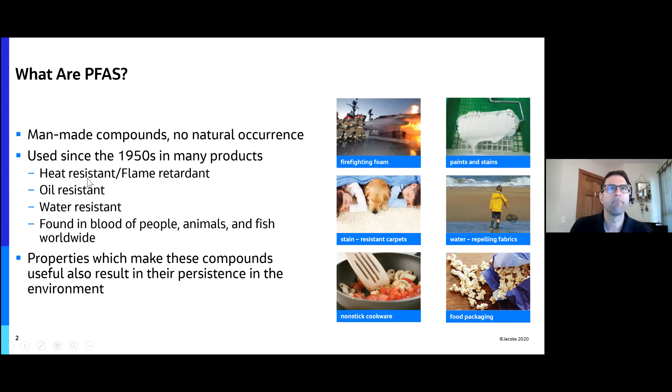Let's see. There we go. Okay, I got it moving now.

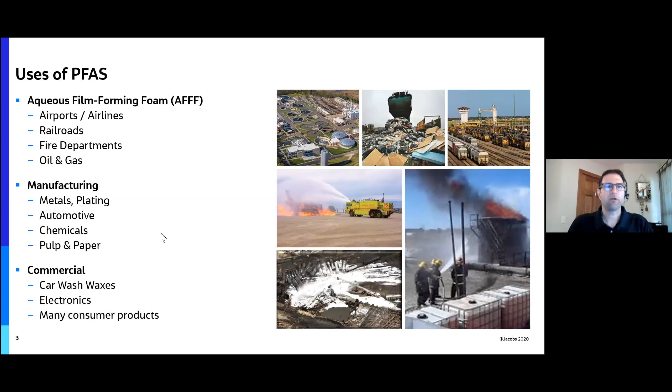We can find point source contributions to wastewater treatment plants related to various industries and landfills, and non-point source contributions may be considered things like drinking water that passes through households and back into the wastewater sewer. But it's important to point out that even if a community doesn't have PFAS in its potable water, we do see PFAS in household discharges. Why? Because there's a consumer use of various products within households, which may be sources within themselves.

Common products that we use, such as stain-free clothing, cosmetics, skin lotions and treatments, food wrappers, and packaging that may end up getting washed down through the drain if you have a disposal. Those all contain various levels of different types of PFAS.

And of course, we're contributing some fraction through human bodily excretion. If you've seen data in terms of blood serum levels, all of the developed world's populations, we all have some level of PFAS in our bodies. So as the half-life of that is long, and it takes a long time to release, there are contributions from us as individuals as well.

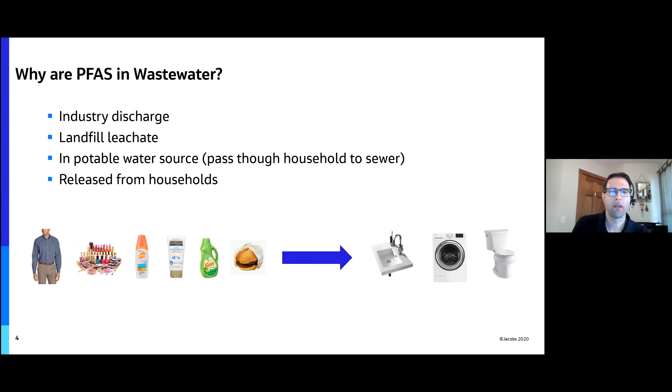RO, although effective for PFAS removal, is most applicable for water reuse or groundwater recharge applications, and obviously is not common for a wastewater treatment plant when it's being discharged to surface water. But when applied, the PFAS in the RO reject still requires to be managed. So we're basically transferring it from one liquid stream to another liquid stream. So we're really just passing it from one place to another, and it's really not being treated. So that requires additional consideration if you're considering RO at the back end of a wastewater treatment plant.

Adsorption via GAC and ion exchange are the go-to approaches for drinking water treatment. And these technologies have limitations, certainly when applying them to wastewater effluent. They will require significant pretreatment for solids, background organic carbon, and inorganic interference.

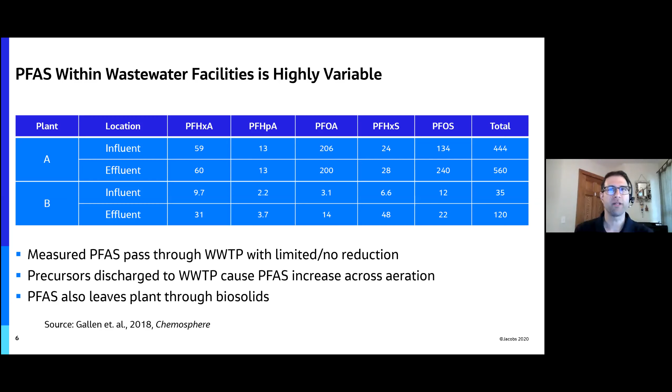In the US and Canada, a substantial portion of the biosolids are land applied. And this is a cost-effective disposal method that benefits both the utility and the agricultural land. Landfills don't desire these materials as they take up usable landfill volume, and they like to reserve these for what they would consider higher value products, such as municipal refuse.

So although the current understanding in the science around PFAS fate and transport in the environment is developing, there is increasing concern with surface runoff, groundwater infiltration, and possibly even plant uptake when it comes to PFAS in land-applied biosolids. In fact, even without specific regulations, there's examples in parts of the US where farmers are refusing biosolids because of their concerns.

So are there regulations related to PFAS and biosolids? Well, not necessarily specifically, but what I would say is 2 things. At the federal level, the EPA is in investigation and development mode. The PFAS Innovative Treatment Team, known as PITT, is actually finalizing analytical methods for biosolids and evaluating thermal treatment technologies around biosolids and in other thermal approaches not having to do with biosolids, but biosolids is definitely one of their focus.

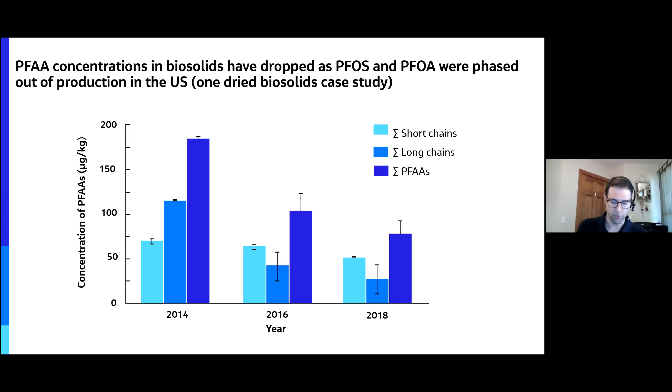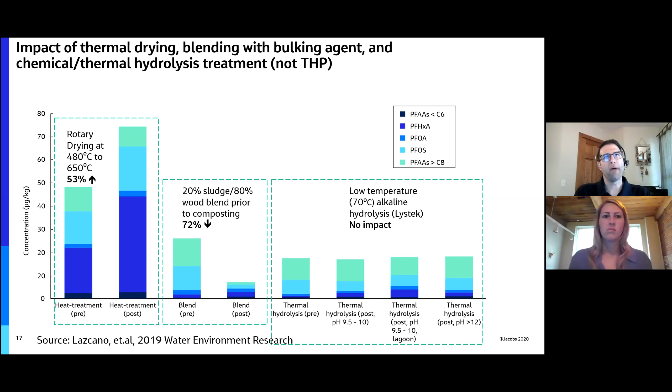So the observed increase is primarily a function of increasing the overall mass concentration through the loss of the water mass in the biosolids, but given the starting moisture content, the increase in PFAS concentrations would be much greater if volatilization of the PFAS didn't occur. So that's why we only see 53% increase instead of a much greater percent increase, because we're balancing the mass increase with the losses due to volatilization.

And this is a significant area, as I mentioned earlier, with EPA, with the PIT program, where they're really taking a hard look at this from an air emissions standpoint of what actually does get destroyed. Are there secondary byproduct compounds that are formed at these higher temperatures? So that's a significant part of the study of the PIT right now.

I should also mention that we've recently completed some testing of biosolids in an elevated temperature pyrolysis system. And unfortunately, I didn't have the data in time due to the COVID to be able to present these, but we just completed the testing a couple weeks ago, and we focused on the solid, liquid, and air fractions for PFAS to quantify the distribution and mass balance across the complete system, including the air component.

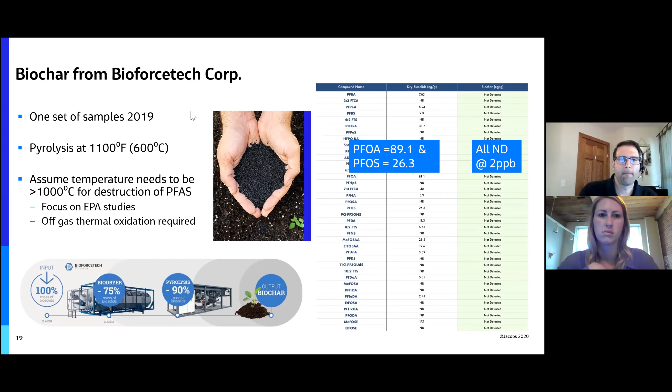So in closing, I'd like to just wrap up with some summary thoughts for the manager of utilities and biosolids in this increasingly evolving world of PFAS around this arena. So one is obviously follow the studies with actual data. Just as an aside, living in New York and in the COVID issues, we had regular daily inputs from our governor on COVID, and I thought it was very appropriate in that situation that he was very clear every day to say that he's following the data and looking at actual facts, and there are a lot of different opinions floating around PFAS as well, and so following studies with actual data is highly recommended.

Following the regulation development, each state is on its own course to some degree, and the pace of regulation development, especially around the wastewater and biosolids arena, is on the rise. And so keeping a close eye on regulations development is certainly very important. If you haven't done it already, update your biosolids management plan. Developing a flexible biosolids program that can be modified as these regulations or these public demands require is certainly key.

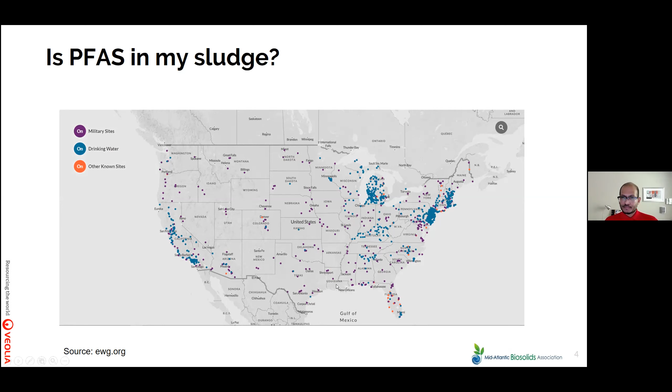And then there are some other known sites. For example, landfills are another source of PFAS, so that's probably what falls into the other category. But in general, we should assume that there is PFAS in your sludge. If you test it, you will find it. So how do you destroy PFAS?

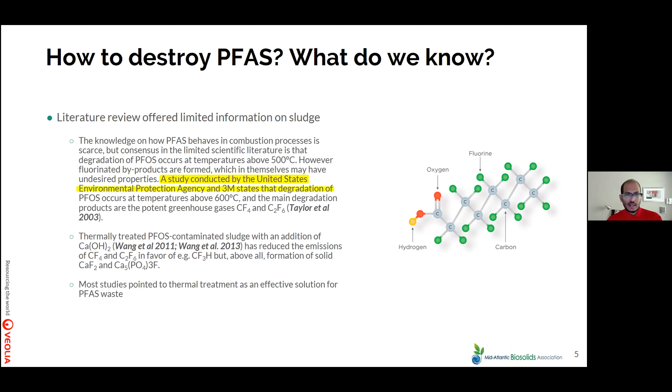When we started researching ways to get rid of PFAS from sludge, we did what we naturally do, which is look at the literature and see if someone else has done studies in the past that could give us a direction. We found a few studies specific to solid matrices having PFAS, and most of those studies led to thermal degradation as the way to treat PFAS.

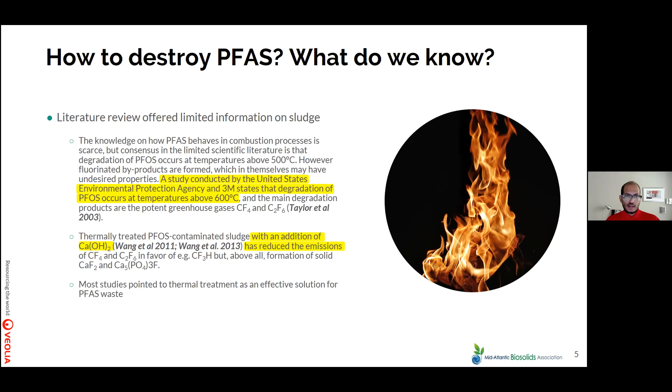There were some additional studies indicating that if you pre-treat the sludge with some chemicals, there's potential for reduction in emissions when the material is combusted. So with this information in hand, we looked at how to go about testing or demonstrating the efficacy of any thermal treatment. We started with a very broad picture here.

We obviously chose an indirect thermal drying system because that is in line with the technology we have available, so we had some data to support that initial study. Incineration was another one, specifically fluidized bed incineration. Again, this is a technology we are very familiar with and have in our portfolio that we could leverage.

We also looked at supercritical water oxidation. There's a local university here, I'm pretty sure most of you know, called Duke. They are doing some work on supercritical water oxidation. So we visited and had conversations with them to see how their work, particularly with respect to PFAS, would impact possible treatment.

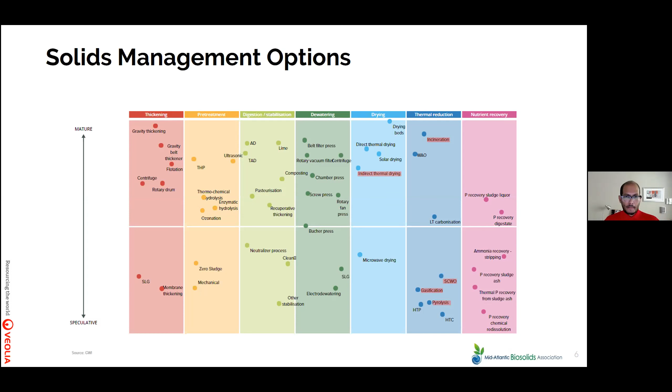So we narrowed it down to these 4 categories: incineration, supercritical water oxidation, and pyrolysis and gasification. We put those in the same bucket, though there is some distinct difference between the 2 technologies, but for our purpose we thought it best to combine them. The last one is a biomass furnace, which would follow a thermal drying process, which is where the thermal dryer comes into the picture.

When you compare these on a side-by-side basis, when you look at the temperatures at which each of these technologies are optimally used at, you can see there's a wide range. And as you can see, some have a very narrow bandwidth or narrow range of use, whereas some are a lot more flexible. When you look at the sludge retention time, or the time the sludge spends inside the reactor, in each of the cases, again, you can see some are really short, some are really long, and some have flexibility to be either or.

And then we looked at the amount of time the flue gas spent within the reactor, to further go through some additional thermal degradation. And again, some are small, some are large. Some come in the form of syngas that could be further used in the process itself. And also we looked at the concentration of sludge that you would be feeding into the reactor.

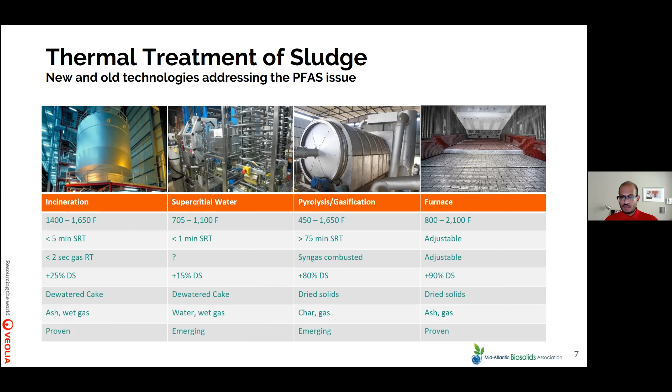And of course, the end products: in some cases you get ash, in some other case you get char, biochar, whatever the case might be, water in the case of supercritical water. And again, some of these technologies are proven or older or mature technology, whereas some are new. So with this data in mind, we decided that we are going to focus on technologies that we could work best with.

But before I go to that, I also want to mention that a lot of the study that's done on PFAS thus far by different providers of these technologies, or manufacturers, or people who research in this field, tend to focus on the primary end product, which is either ash, water, or char in this case. But there's not a lot of information out there in terms of what happens to the emission. There is some study that was performed earlier this year in Manchester for an SSI, a sludge incinerator. I believe it's a fluidized bed, but we haven't seen any data from it.

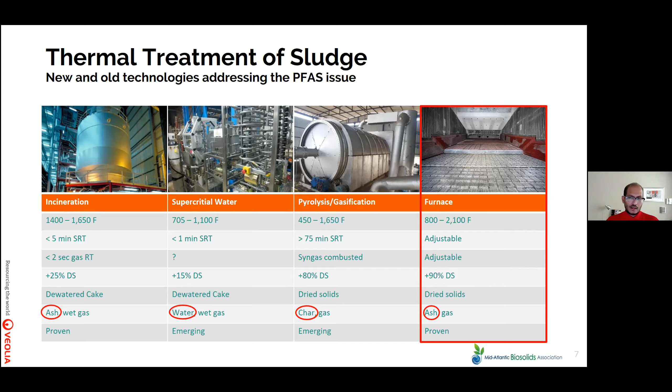We're trying to perform a mass balance around the entire process, not just in the ash component, but also in the emission component. With that being said, we focused on the furnace and the dryer as the primary vehicle for our study. We wanted to use that as the technology which we would further in the study. And just a quick spotlight on how this technology is set up. Basically, you would bring in sludge anywhere between 15% and 30%. This is dewatered cake, and you would run it through a dryer.

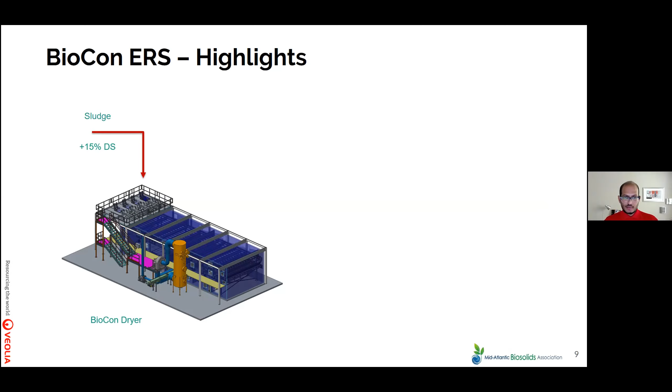In our case, we're using a Biocon, which is a medium temperature belt dryer, and that would produce a biosolids that's a Class A product actually, which would be 90+% dry. In our case, it's close to 95% coming out, which is used as a biofuel in a furnace, which we call the ERS. It's primarily used for energy recovery, hence the name ERS.

And the flue gas from the furnace would then be captured, and using a heat exchanger, either an air-to-air or air-to-thermal oil heat exchanger, we would capture that energy and put it back into the dryer to drive the drying process. If all things go well, you should have enough energy, especially if it's an undigested solids. You would have enough calorific value to drive this whole process and become fully thermally self-sufficient.

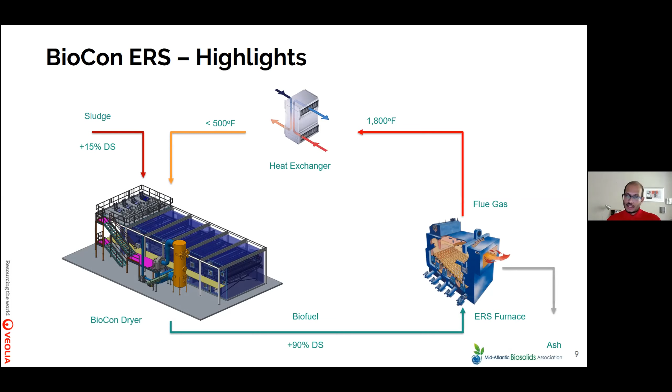How does it look in the real world? So as you can see on the left side, the dryer looks like any other belt dryer I would imagine. And the furnace is a relatively small component. It's a step-grate biomass furnace, very commonly used in Europe, especially in the Scandinavian part of the world, for using wood chips as a source of fuel. And the heat exchanger could be either like the one you're seeing here, or it could be an economizer, or tube and tube, or tube and shell, whatever the case might be.

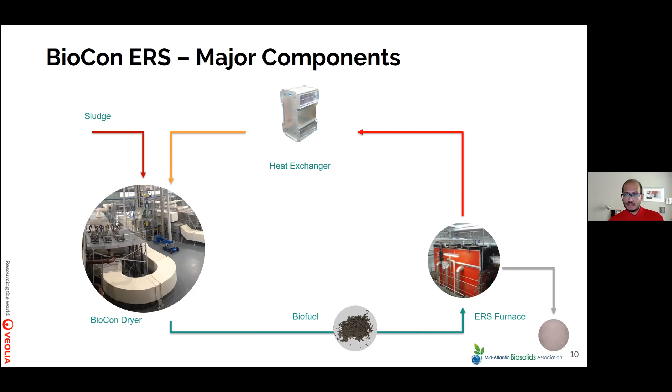So how does it look in a full scale? So this is not a new technology by any means. We have a plant that's been in operation for close to 12 years now, or maybe 13 years now, where the same exact technology has been applied. But in this particular facility, we are not using it as part of PFAS treatment, but it's more for the energy recovery aspect of it.

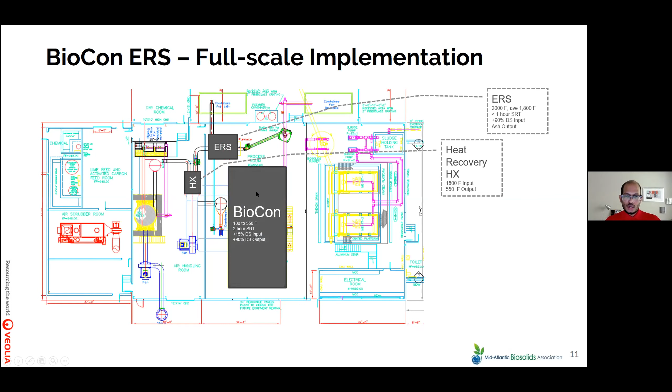There's the dryer, which operates between 180 and 350 degrees Fahrenheit, and then you have the ERS, which is capable of going up to 2000 Fahrenheit. And the heat from the exhaust is captured through a heat exchanger prior to the air being recirculated back into the dryer. At this particular facility, we have a dry treatment initially for particulates, where we add some GAC, granular activated carbon, for mercury removal. And there's also an option for wet treatment for further treatment.

But when this plant was built, there was no SSI regulation. The MACT was not enforced. So it's treating to probably a tier 2 or tier 3 level of treatment right now, triple L maybe. But we can design it to meet the Quad L regulations as well for the new SSI. What we don't know, or what we have not measured thus far, is whether there is any PFAS that comes off the emission. And I think that's where the research focuses.

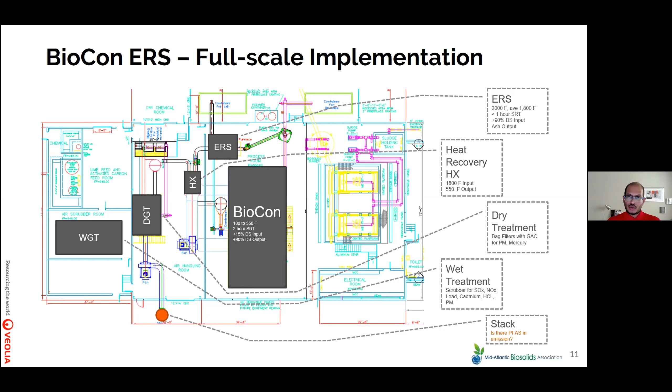So jumping quickly to the research, this was done on a laboratory scale. We partnered with the University of Dayton. The reason we partnered with them is when we did all of our literature review, we found a lot of work that UDRI had performed in the past for EPA, DuPont and others, with similar studies where they looked at the fate of PFAS in different materials. We figured they should be able to do the same thing for us with sludge. It's a self-funded study, so we didn't look for any grants or support from any other organization. Again, the intention was to commercialize this technology, so we didn't want to get any funding from elsewhere.

We did the study in 2 different phases. The first one was basically the transport, the science of PFAS undergoing thermal decomposition. In the second study, we looked at the fate of PFAS, what happens in all 3 phases, which is the solids, the liquid, and the gas phase of the combustion. And the deliverable was really to figure out a fluoride mass balance across the entire process. As I mentioned, we had to look at what happens to PFAS once sludge is thermally oxidized, what happens to the PFAS if any remains in the ash. At the same time, we had to look at what happens in the emission.

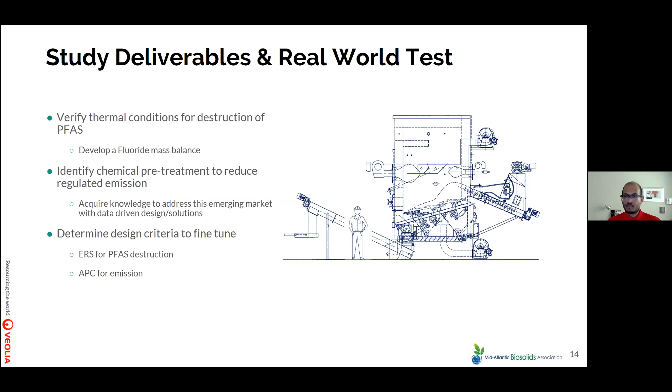And we also had some additional work done to make sure that none of the PFAS is actually accumulating within the system itself. And again, we wanted to have a data-driven solution for the real world, so we didn't want to just build the system. The worst thing we could do is remove PFAS from sludge and put it in the emission, and that's not something we wanted to do. And also, we had to figure out if there's any additional air pollution control technology that we need to add for additional chemicals or components, and we anticipated it to be something like hydrofluoric acid or hydrogen fluoride coming in because of combustion of PFAS material.

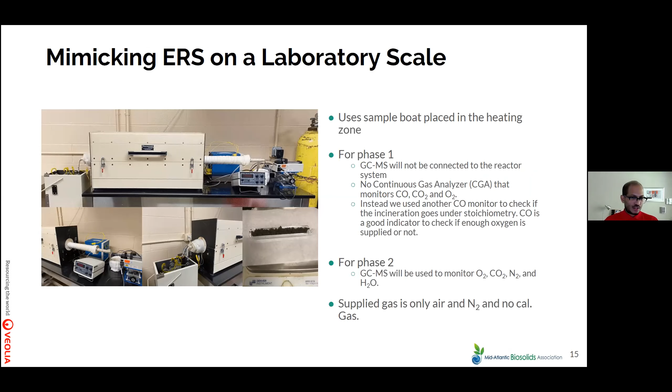And then we will combust the material. We'll capture the emission through these impingers in the back here, and we would then do some steam cleaning and things to ensure that there's no PFAS that accumulates within this reactor. And we do this for every study, every test, to make sure that we capture all 3 phases of this material within the system.

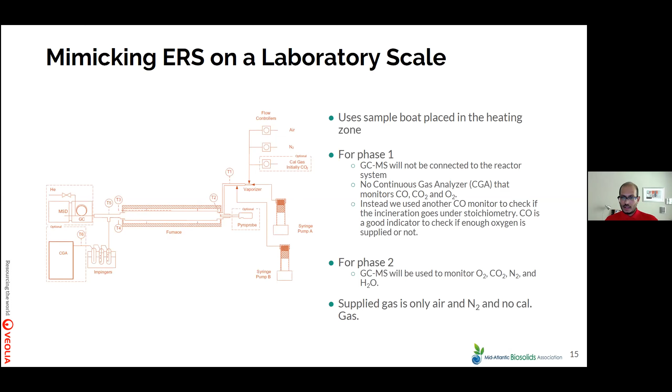In terms of the challenges, the very first challenge we had when we wanted to do the study was to get sludge which had a high concentration of PFAS. As common as it is to have PFAS in sludge, high concentration is not generally easy to locate. And even when we found a few plants that qualified to have this high amount of PFAS, it was really difficult for us to get them to sign a non-disclosure agreement because they didn't want us to even accidentally disclose the location on the data from this test.

So one thing we did was we redacted all location information from samples as we received the samples. As you can see, we shipped empty buckets with scoops and such, and we got it back. We made sure that the bucket itself does not have any location information, so it would come in a different packaging, and then we would destroy the packaging and we would put all the buckets in one room, so we ourselves didn't know where this material came from.

And definitely after we dried it up in our laboratory to bring it up to the 90-95% dryness for study at the UDRI lab, we shipped it out with no labeling to say where the sample was, because we ourselves at that point did not know where the sample came from. So finding and getting people to share the sludge was one of our biggest challenges.

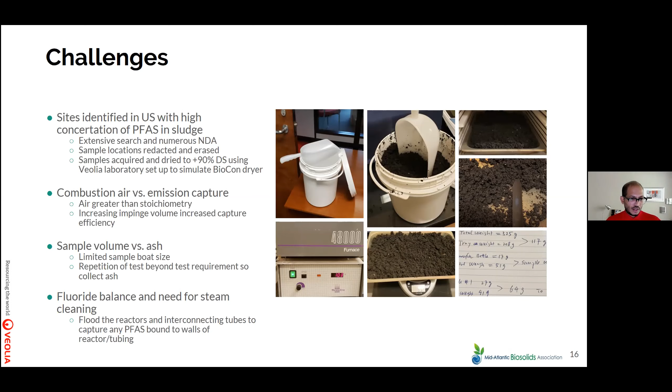And finally, in order to have the full fluoride balance, unlike any other study that's done on a full-scale basis, here we had the luxury of actually washing down the entire reactor with steam to scrub anything that could have potentially gotten stuck around the reactors and in the tubings, so that we were making sure that this compound doesn't just come off sludge during combustion and then stick to the insides of the reactors, where we may not see anything in the emission, but it still exists inside the reactor itself. So we had to make sure that was something we were able to do successfully also.

In terms of the timeline, we were really hoping that we would have gotten done with the study by the second quarter of 2020, and as you all know, that didn't happen because of the pandemic. But just recently, about 2 weeks ago, we started the study back on. So some of the results are trickling back in. It takes about 3 weeks after every run to have usable data. And I think with that, we should have the report done by the end of the year. Hopefully, we should have it published in some journal by the first quarter of 2021.

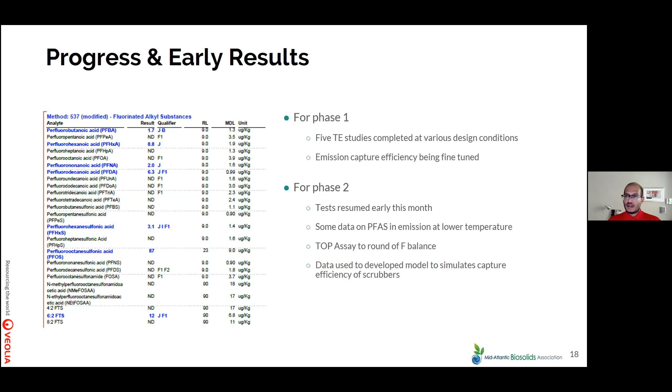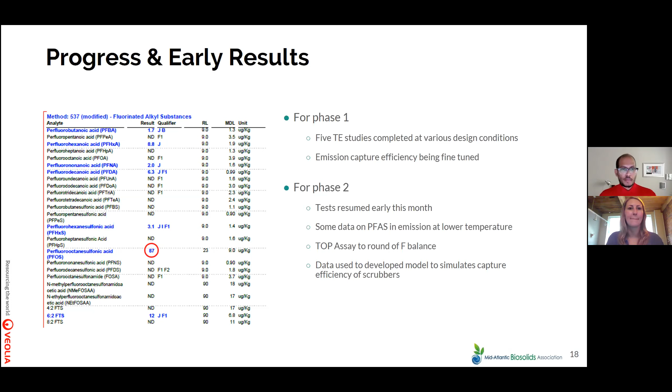Some early results. So we did about 5 thermal transfer efficiency studies, basically to see, at various temperatures, how PFAS goes from the solid phase to the liquid and gas. And then obviously we had to do some emission efficiency as well there. Stage 2 is on, quite a few studies done at lower temperatures, but we are going to be studying the higher temperature for further analysis. And I'm going to skip this slide here and quickly go back to the summary.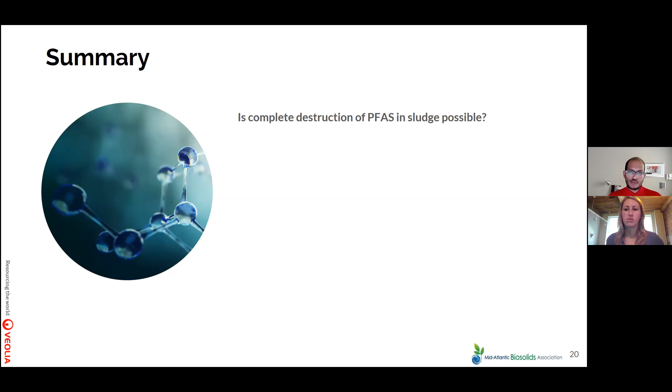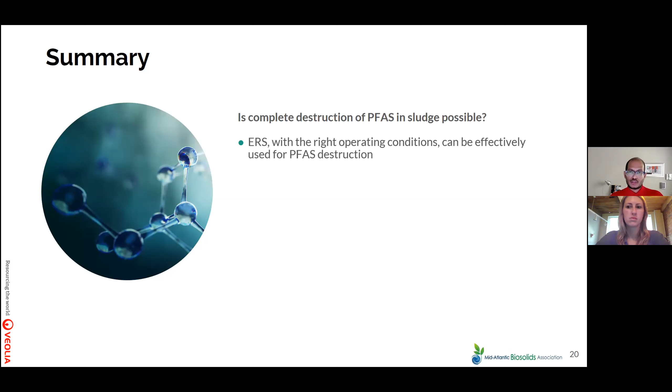So the question is, is complete destruction of PFAS in sludge possible? I think that's the question we try to answer, and the answer is yes. Under the right conditions, you could effectively destroy PFAS of the compounds that we can measure, which is about 24 compounds, and the total oxidizable precursor assay would still yield a good 90 to 99% destruction. The other studies that we are still waiting on: the initial emission data shows that it's promising in our case to not have any residual PFAS in it, which is good because, as I mentioned earlier, the last thing we want to do is take it out of the sludge and put it in the air.

We have to consider hydrofluoric acid management inside our air pollution control train. And there's a cautionary note here. If you have an incomplete combustion, we have to study further to ensure that your PFAS is not in your emission. With that, I should be able to take some questions.

All right, thanks, Sudhakar. So we have one question: where is the Biocon ERS installation? Have they done testing to show PFAS removal? So the question was, where is the Biocon ERS, and if they have done any testing to show PFAS destruction. The facility is in Buffalo, Minnesota. It's about an hour northwest of the Minneapolis airport. It's a suburb of Minneapolis, actually. They have been using this for about 12 years now.

But unfortunately, I won't be able to share any PFAS information about that specific plant because we have done some independent work with their data, but they haven't done any that's publicly available right now. There is some information on the sludge and the ash part of it, but on the emission side, I don't believe they have any information yet.

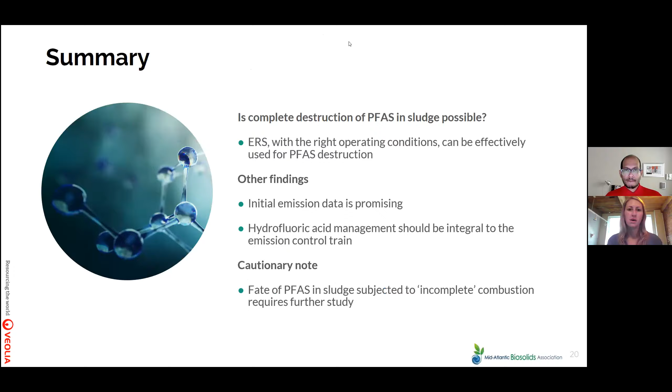Dr. Steven Zemba. Dr. Zemba will be presenting a technology overview on methods of assessing health and environmental risks of organic micropollutants in biosolids. Dr. Zemba currently works for Sanborn Head & Associates, where he works on projects involving fate and transport modeling, exposure assessment, and risk assessment. He's a frequent presenter at conferences and has published numerous articles on topics related to environmental modeling and risk assessment. He attended Carnegie Mellon University and then earned a master's and PhD in mechanical engineering from MIT. Dr. Zemba was recommended to speak at this webinar series by Ned Beecher of the Northeast Biosolids and Residuals Association for the assistance he's given thus far in framing the risk of biosolids-borne PFAS. Dr. Zemba, over to you.

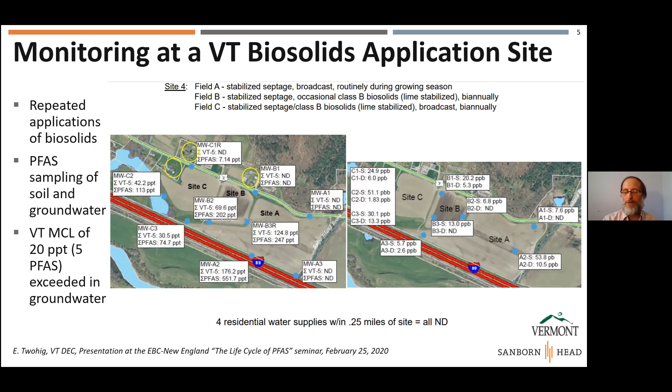And this is a site in Vermont where there have been repeated applications of biosolids over years with 3 fields. The thing to look at is on the left side there, the part per trillion numbers are the groundwater monitoring data. Vermont has a standard of 20 parts per trillion. And at these particular sites, and these are very site-specific results, you can see that the 20 part per trillion number gets blown out of the water. This would be a significant issue if there were drinking water wells nearby. Thankfully, there aren't. But there do seem to be impacts coming from biosolids applications at these sites, or at least sludge application.

I want to get to another famous site in Maine, infamous site at this point. Some of you probably have looked at this in various ways, but this is the Stone Ridge Farm, and it was a site where the farmer found PFAS in his milk supply coming from his dairy cows. There's been a lot of monitoring of a lot of different media at that site. There is a drinking water source nearby. It hasn't been affected at the 70 part per trillion level that we care about in Maine yet. But certainly groundwater has been affected. But one of the complications to this site is that they also accepted, we think, paper sludge for a while. So some of these sites are complex. They involve maybe over-application of biosolids in some cases.

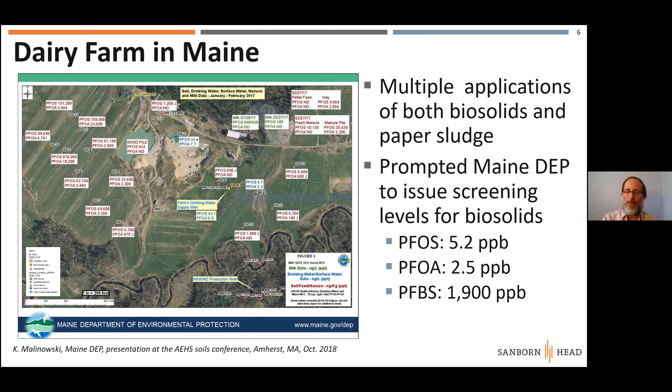But this did take Maine down the road of establishing those screening concentrations that Scott alluded to for PFOS of 5.2 parts per billion, or for PFOA of 2.5 parts per billion. There's also one for the 4-carbon sulfonic acid. That one really isn't affected by much, but since there was tox data, they derived that 1900 part per billion number, just not very consequential.

Something we should think about, and I'm changing topics quite a bit here, but PFAS have been around for quite a while, as we heard from Scott, and there has probably been long-term atmospheric deposition from all the stuff we put up into the air that came back down to the ground. We did a study in Vermont with the University of Vermont looking at kind of pristine soils, and this is Vermont, so we're pretty remote. We were finding low part per billion levels in a lot of those pristine soils.

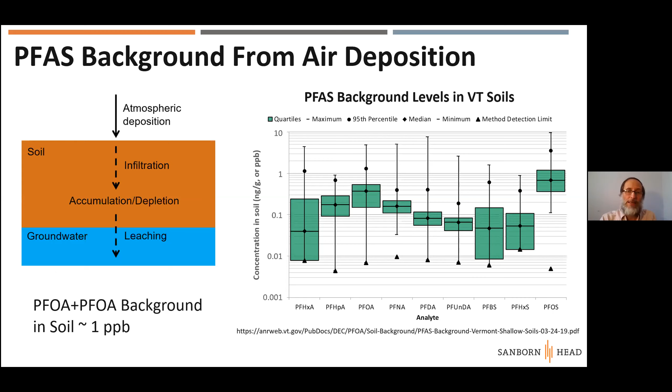The median concentrations of PFOA and PFOS, that's a little typo there, the background level is about 1 part per billion if you sum those two up. And the 1 part per billion is about an order of magnitude to 2 orders of magnitude lower than what you see in sludge. And the lesson from that is that sludge accumulates PFAS. And we kind of know that because it's accumulating in the wastewater treatment plant.

If you apply those equations to PFAS, and it's a difficult thing to do because properties of PFAS are difficult to even measure or characterize because these are surfactants and they behave very strangely in soil. But it turns out that when you apply these models with some values you can get out there in the literature for properties, quote unquote, what you see is that you don't need very much in soil to drive significant levels in groundwater. And that's kind of how the state of Maine gets to those relatively low numbers being the acceptable levels for PFAS in sludge.

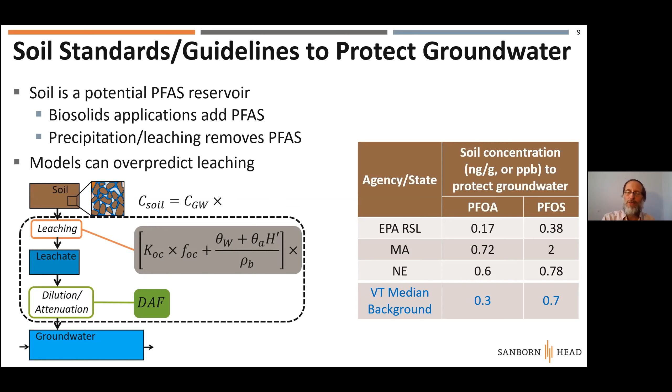I just want to finish this with all models are wrong and some are useful. The model in this case is not a very good one for PFAS. And unfortunately, we don't have a better model at this point, but that's an area that we need to look at and research. I think in summary, what we're going to see down the road is that there's going to be more monitoring of sites. I think that biosolids applications should continue. I think in most sites it's probably acceptable and you're not going to see excessive groundwater impacts. Want to watch the surface water concentrations and those standards coming out.

If you have questions, feel free to call me or contact me or contact my colleague Pauline, who's in the Philadelphia office. And I'd encourage everybody, and this is something Scott worked on with me and many others, it certainly wasn't us alone, but the ITRC has wonderful resources out there for educational materials on PFAS, and I encourage you to go to that website and check out that information.